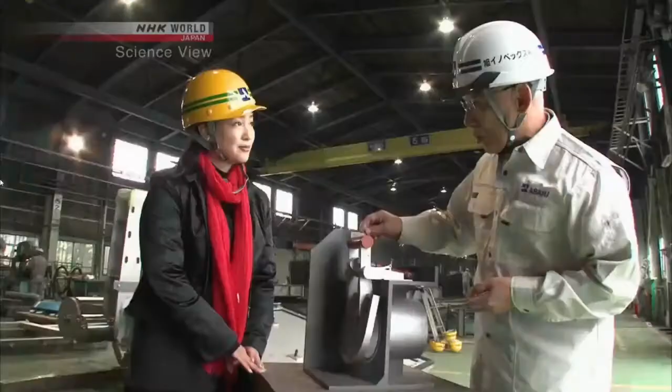J Innovators Takumi is a popular segment on Science View. We'll introduce several revolutionary inventions by Japan's Takumi that have enabled significant advancements in disaster prevention technology.

Science View is a regular program broadcast on NHK World that features Japanese science and technology. Today we're bringing you a special edition featuring Japan's Takumi, which I report on in the J Innovators section of the show. The subject of our program today is disaster prevention through preparedness.

We invited Assistant Professor Megumi Sugimoto of the Institute of Decision Science for Sustainable Society at Kyushu University to join us as a commentator. Thank you for coming. It's my pleasure. Dr. Sugimoto, I know that you specialize in risk management for disasters and are working hard at disaster prevention and recovery work overseas.

First, could you tell us about the characteristics of Japan's natural disasters? Certainly, Japan has some of the most disasters involving water, and stands out for earthquake damage.

This is a list of natural disasters that have occurred recently in Japan, where there was significant damage. In each of these disasters, more than 10 people were killed or went missing. I remember reporting on these large disasters for other news programs, yet looking at this list again, it really seems that large disasters are happening every year.

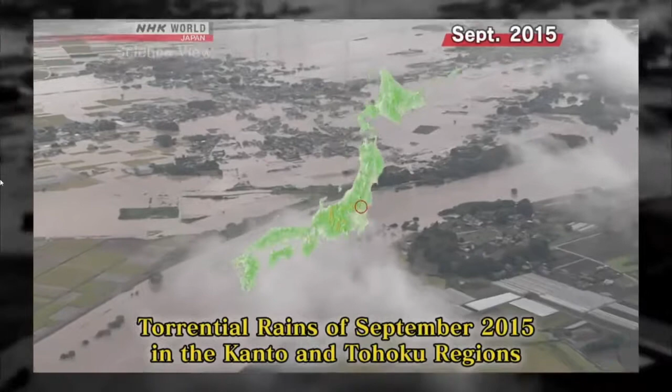September 2015, eastern Japan was attacked by record torrential rain. Several places in the northern part of the Kanto region had a total of more than 600 millimeters of rain over 4 days. A sudden increase of water in the Kinu River, which runs through the city of Joso in Ibaraki Prefecture, caused the river's levee to burst. Due to flooding from this breach, 40 square kilometers—about one-third of the total land of Joso City—was submerged. Approximately 4,300 people who were unable to escape had to be rescued by helicopter or boat.

I'm at an area heavily affected by a river embankment that burst in 2015 due to heavy torrential rain. Torrents of muddy water enveloped the area, destroying over 50 houses. Over there is a river embankment that collapsed. It is now 2.5 years since the collapse, and the reconstruction work has finished. Let's go and have a look.

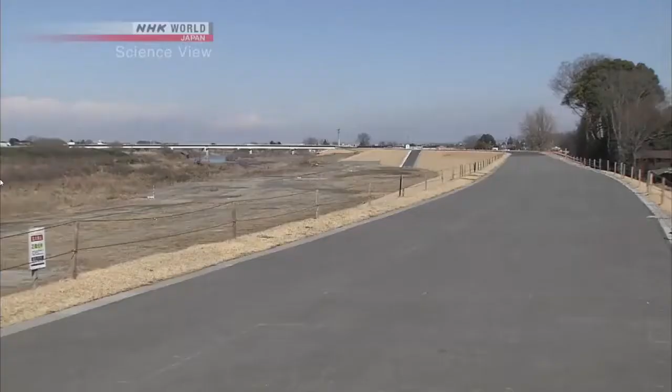Over there is the Kinu River. This is the ordinary water level. The embankment was repaired and enlarged to be 2 meters wider and taller than the previous one. We spoke to the person in charge of river management for the Kinu River.

As you can see, there are a few new homes over there. These homes are new because the previous structures were washed away by the torrent of river water. They were rebuilt in the same location.

Why did the embankment fail here? This area's embankment was built a little low. The water level of the Kinu River rose up and over the embankment. The water overflowed into the residential area on this side of the embankment, and it rapidly started to erode the embankment until it completely failed.

I see, so the water level was greater than the embankment could handle. That's correct. The unexpected collapse of the embankment caused a complex disaster, with houses washed away and destroyed and lifelines that broke down. We could say this happened especially because the infrastructure was well developed, and on the other hand, Japan's aging infrastructure could cause a major problem in the future.

The embankment in this area was built in the 1940s. The old infrastructure may not be able to withstand future natural disasters such as earthquakes and floods. Therefore, it is important to quickly find sections that have deteriorated with age and deal with them promptly.

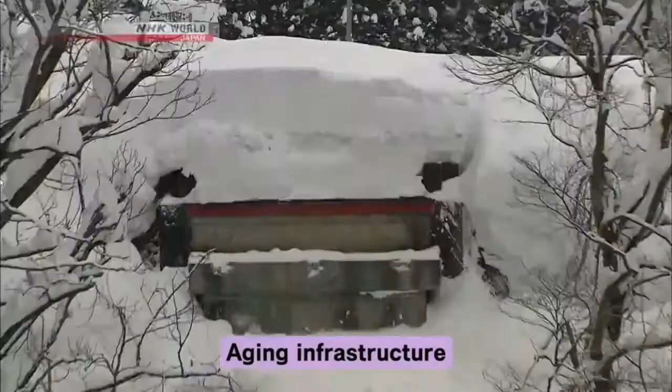Mino City is located at the north of Osaka Prefecture.

Hello, I'm Michelle Yamamoto. This is today's Takumi, or innovator, Kazuhide Nakaniwa. He runs a construction site surveying company that takes measurements during construction projects.

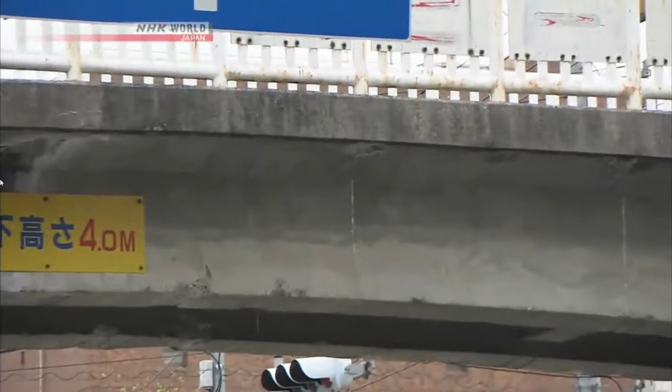The device next to the Takumi was created to tackle the problem of aging and deteriorating infrastructure. Right now, we are using the device to measure the cracks in that bridge. Viewed normally, there aren't any visible cracks, but when you look through the device, you can really see it up close. It's almost like using a telescope. The cracks are clearly visible from 20 meters away.

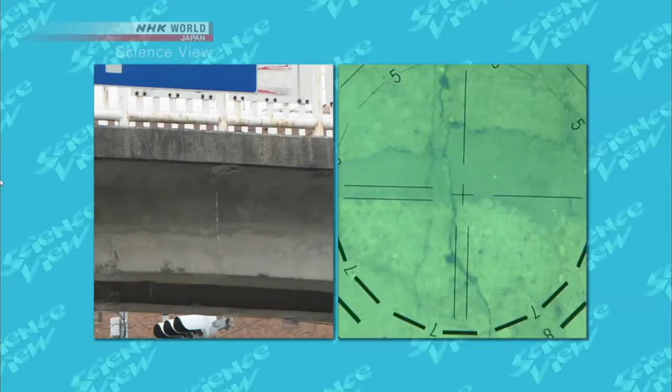But detecting cracks isn't the only thing this device can do. It can load the data into a computer as a 3D image.

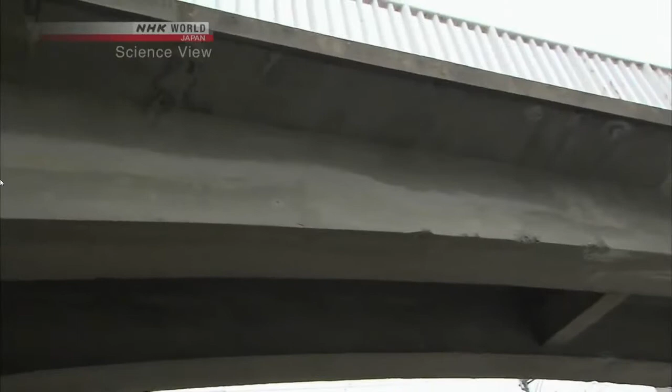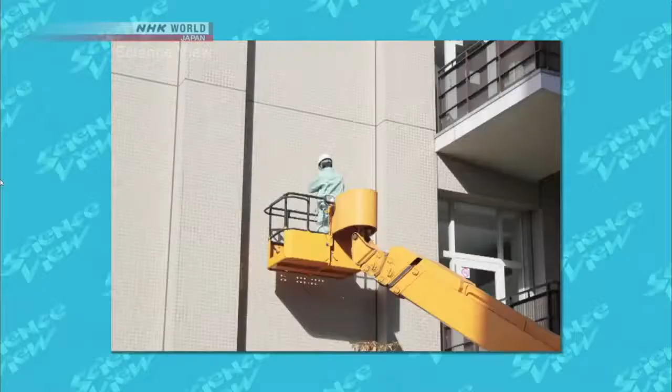A detailed study of the cracks is needed to assess the state of an infrastructure. But until now, cracks were measured with a special ruler placed directly on the crack. To do this, it was necessary to bring in a crane car or build a scaffold, and most crack records were drawn by hand.

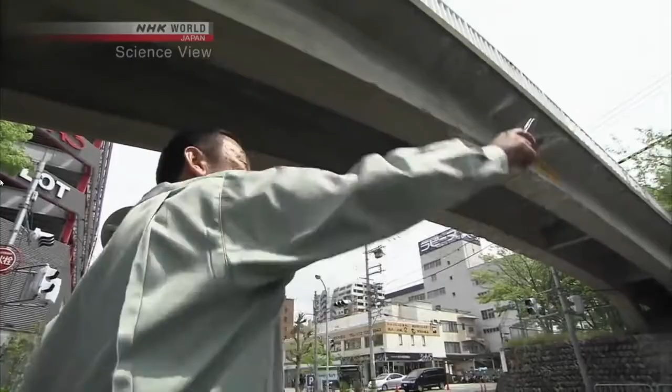A comment from one of his on-site workers motivated the Takumi to create this crack measurement system. He said, 'Why do engineers have to draw sketches?' That question got me thinking. This was the resulting device.

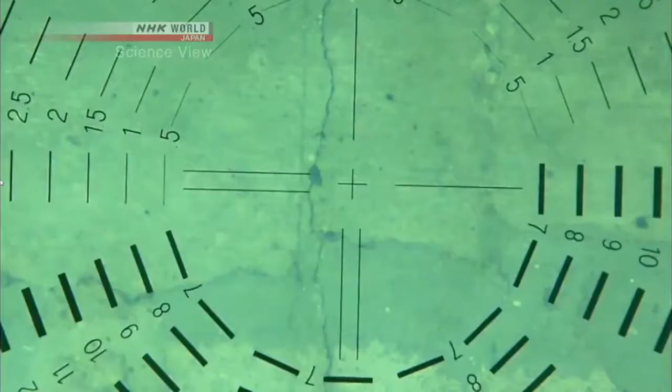You can observe cracks from a distance and keep a precise record of its shape. The Takumi's knowledge and experience in the field helped him develop the device. Laser measurement technology was used to measure accurately from a distance.

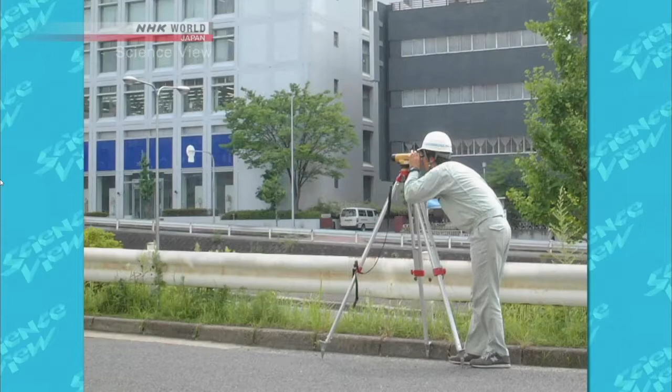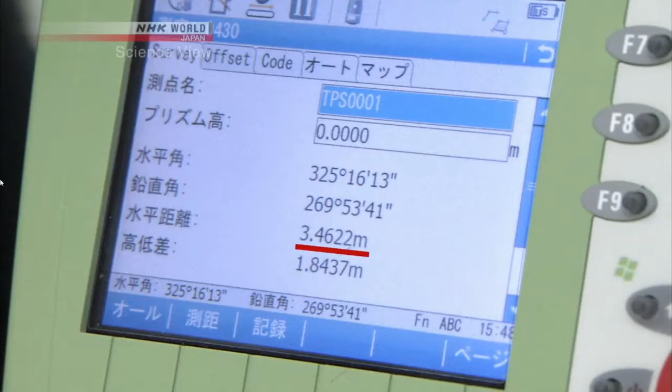With the press of a button, the Takumi's crack measurement system emits a laser beam which hits the wall and bounces back to the device. The distance is 3 meters, 46 centimeters, and 2.2 millimeters. It can accurately measure up to 1/10 of a millimeter. The viewfinder is equipped with a scale used to measure the width of a crack. By finding the scale line that matches the crack, they can calculate the crack's width based on the distance.

But there was still one problem: the width appears different depending on where you look at it from. This vertical line looks much thinner from the side. Let's use these lines as an example — the greater the angle, the thinner they appear. The angle affected the accuracy of the reading.

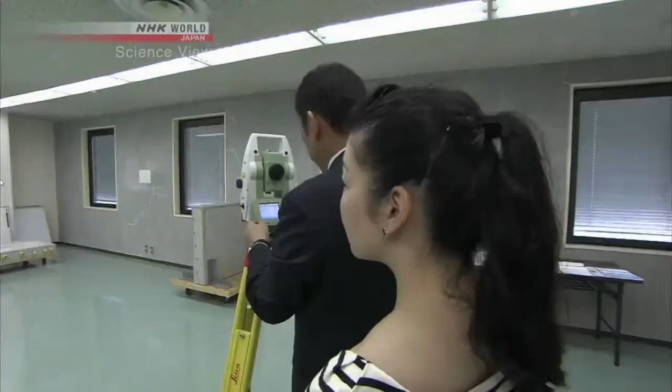To remedy this, the Takumi's device has a function that makes adjustments as necessary. It seeks out the incidence angle and uses it to calculate the width. It needs the incidence angle of the crack. The key is to measure the distance between 3 points near the crack. By calculating these numbers, the device is able to find the incidence angle, and then, based on the incidence angle, it can calculate the actual width of the crack.

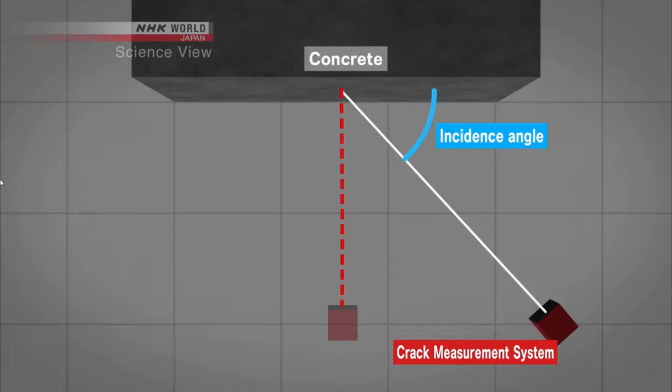This was how the concrete crack measurement system, which can detect signs of deterioration from a distance, was developed.

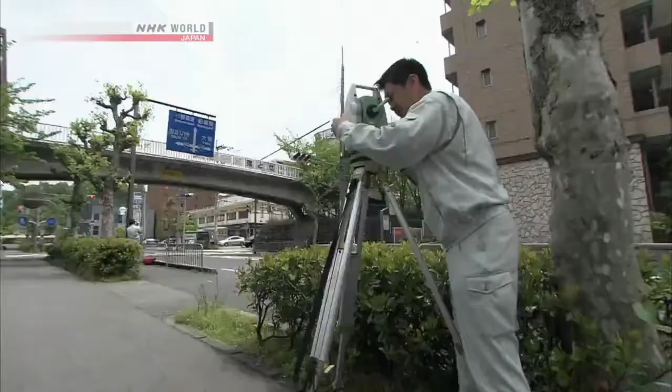The deterioration of infrastructure — the Takumi believes this problem extends well beyond Japan. Infrastructure is directly connected to human lives. I want to prevent developing countries from making the same mistakes as developed countries. I hope that they will take an interest in maintenance and work to detect cracks at an early stage. The Takumi's device is sure to play an important role in Japan, where measures for aging infrastructure are in high demand.

I'm by the riverside about 800 meters from the area that had collapsed, and here is a floodgate. Normally it is open to allow water from outside the embankment to flow into the river, but when there is heavy rain and the water level rises, the gate is shut closed to prevent flooding. During the heavy rainfall in 2015, the local official in charge closed it by hand, but it is a very dangerous task to do when the water level is rising. That is why one Takumi developed a floodgate which opens and closes automatically depending on the water level.

Hello, I'm Michelle, nice to meet you. Oh, thank you for coming. I'm Hoshino. Today's Takumi is the president of a floodgate manufacturer, Kyosuke Hoshino. We went straight in to see the floodgate his company invented.

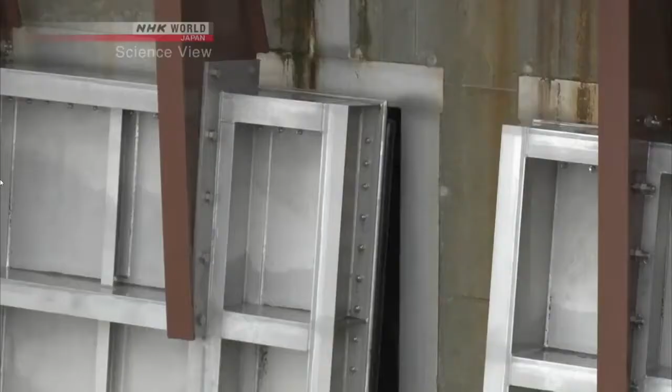This is one of our floodgates, although it's not finished yet. Oh, so this is it. This is one of the Takumi's floodgates that has been installed on a riverbank close by. In hearing that the gate required neither an operator nor any power, I had imagined a sophisticated high-tech device, but it turns out to be a very simple mechanism.

The most important elements are the weight at the top of the gate called a balance weight, and a float on the inner side of the gate.

The gate's mechanism for opening and closing works like this. When there's heavy rainfall and the rainwater accumulates on the right side, the gate will be pushed to the left side. Then, with just that slight force, the balance weight falls to the right side, opening the gate to the left. By the principle of leverage, a gate that weighs more than 500 kilograms can open automatically with changes in the water level.

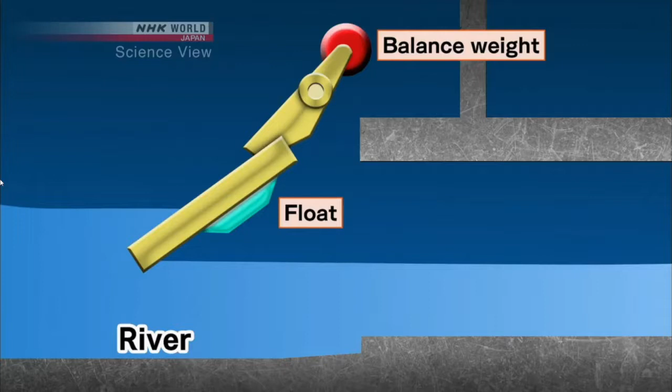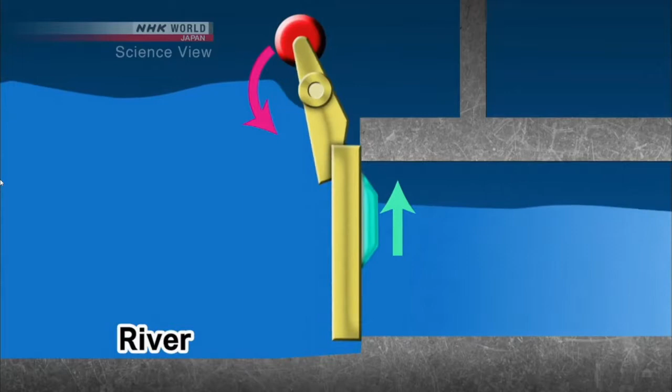On the other hand, when the level of the river rises due to backflow from high tides or tsunamis, the gate will be pushed to the right and the balance weight will return to the left. The float will gain buoyancy, and that force then causes the gate to shut tight.

This automatic floodgate is designed to open and close using the power of leverage and buoyancy, but no electric or other power source.

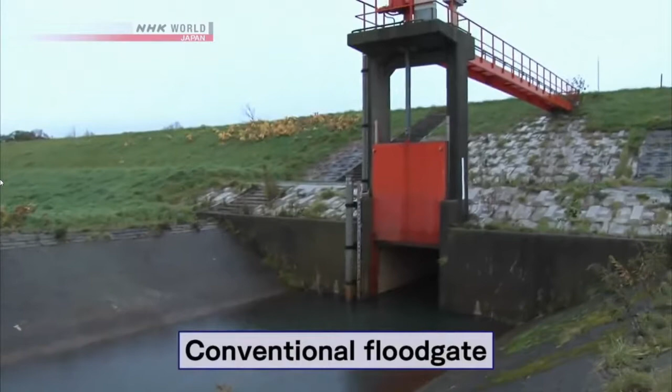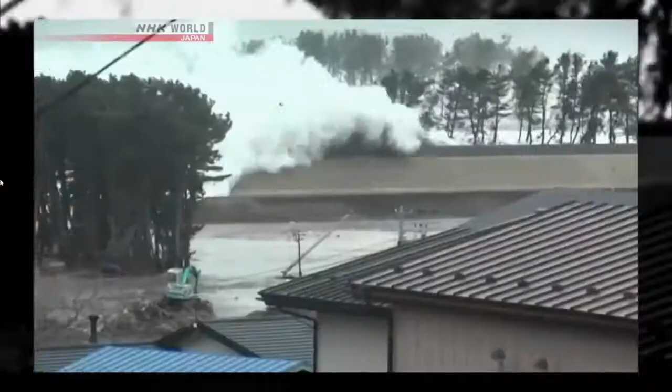Many conventional floodgates require winding or other manual operation to be opened. A person must be available to check the water level and manually open and close the gate. In fact, when the huge tsunamis hit northeast Japan in March 2011, many volunteer firemen lost their lives trying to operate floodgates.

By using our floodgate, what once required a human hand can be achieved without any operator. That can save lives. But he encountered more than his share of difficulties in reaching this point.

Well, we went through endless trials and many errors. We got a lot of negative remarks. It wasn't easy. Also, achieving balance with the actual device using the calculations we had made was very difficult. It was hard to make it work as we had figured it.

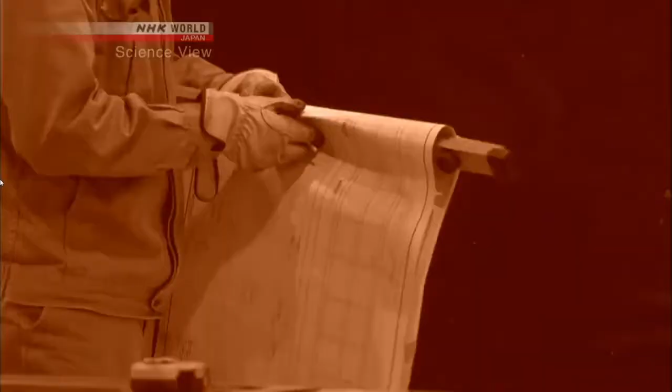It is 15 years since the Takumi's company first started development of this mechanical automatic floodgate.

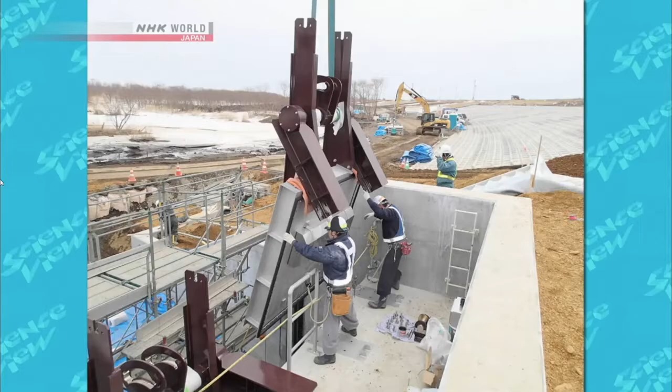Added to the difficulties they had in the design phase, without a proven track record, it was difficult to get the device accepted. People are always afraid to take a risk on something new. They go on using what they know without questioning it and feel safe that way. So, to change that and convince people with that mindset, we had to keep on telling them how good, how effective it is. It was an uphill battle, I can tell you.

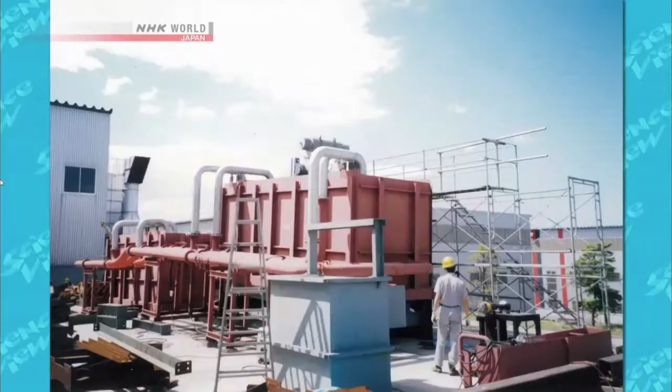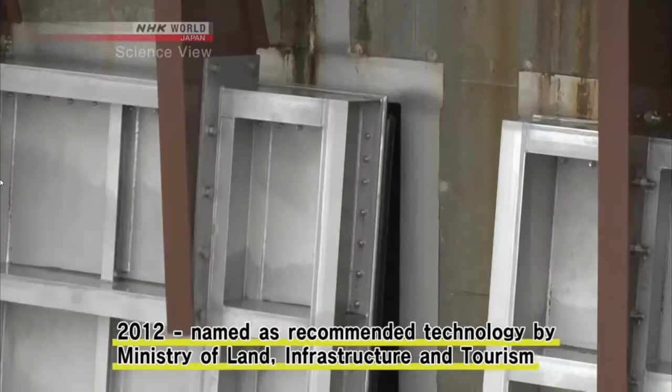Even after the floodgate had been installed, to obtain government recognition, they needed to carry out testing and demonstrations over and over. All their hard work paid off in 2012. The floodgate was selected by a government ministry as a recommended technology. This triggered widespread recognition of the device.

I want to take this all over the world. If this could be of use to others, I would love to take on that challenge. I really hope to be able to do that.

The Takumi's auto gates had been adopted in 3 locations among the Great East Japan earthquake disaster areas, and all of them operated normally. Thanks to those results, the gates were installed in many more places later on. Now in 2018, nearly 1,700 gates have been installed around Japan, and I heard that they're fully demonstrating that functionality. Considering that it can be quickly used even where the electric power situation is poor, this really is incredible technology. I hope this can be used more and more for flood control, not just in Japan, but overseas as well.

And what did you think of the crack measurement system?

Much of Japan's infrastructure was built in the 1960s and 1970s, during what is known as the high economic growth period. Now Japan is facing a significant problem as that infrastructure ages. So I think this equipment is really necessary. This technology seems really useful for disaster prevention, just like with the floodgates, as it is a means of acting preemptively before disaster strikes.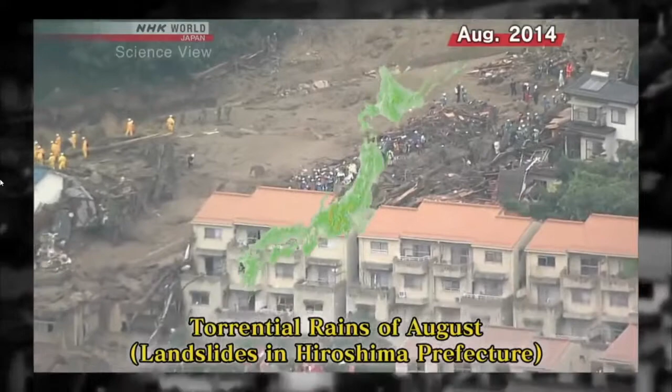From the night of August 19th, 2014, to the morning of the 20th, torrential rain concentrated on a narrow range of the city of Hiroshima. More than 200 millimeters of rain fell in 3 hours, and a large-scale landslide simultaneously occurred, causing the deaths of more than 70 people.

The damage spread because the area which experienced the severe rainfall was a residential area close to the mountain with homes that were very close together, and it happened during a time when it was difficult to respond. This is also called an urban-type sediment disaster.

Sediment disasters happened in more than 100 areas within the city, and as reconstruction continues, the evidence of the disaster remains. One couple who had escaped danger by just a few meters shared about what it was like then.

The amount of rainfall seemed a little different. I was surprised to find that the windows were completely black. Muddy water had covered the entire window. When we woke up, we saw that the homes around us were destroyed. The home next door was half destroyed by the landslide, and the homes one level above were completely destroyed with 2 people killed. The husband showed us photos he took directly after the disaster.

Is this really the top of the roof? Yes. The sediment flowed up to the top of the roof, nearly 3 meters from ground level.

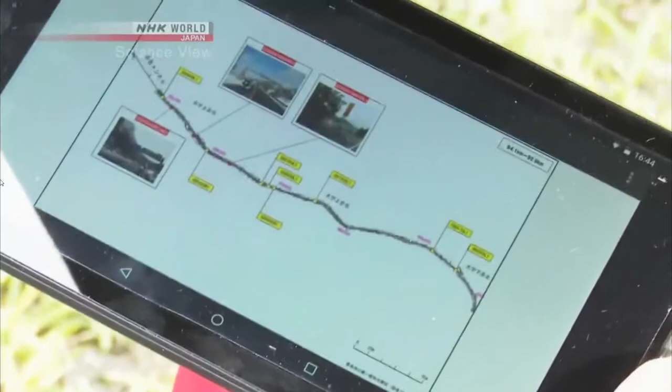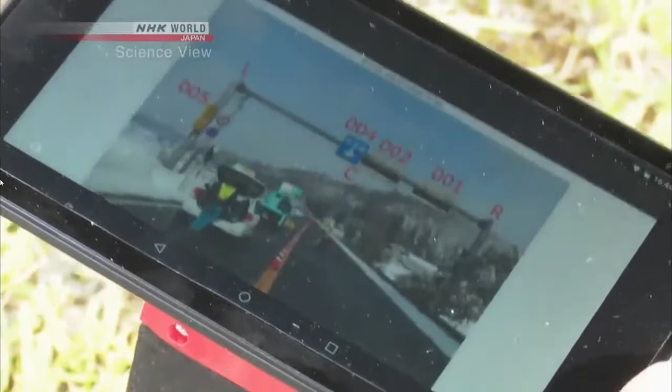The screen showed information about a road. The marks shown are spots that have already been inspected. There are also photos and detailed reports from each inspection.

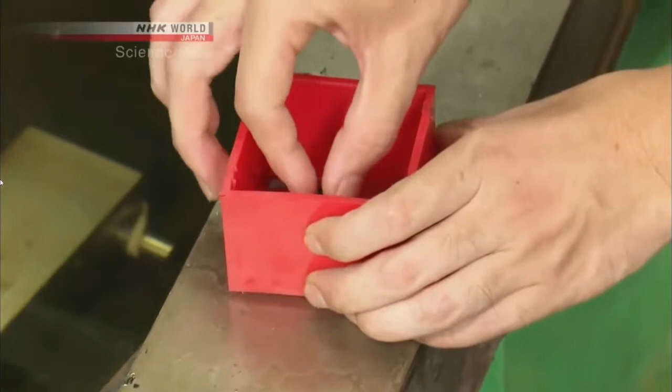Inside the stake, there's a radio frequency ID tag, like this one. The radio frequency ID tag, or RFID tag, is 2 centimeters wide and protected by a shockproof material. It is located in the top part of the stake. Each tag is capable of storing data.

A smartphone application reads data from the stake and forwards it onto an internet server where it can be viewed. And it doesn't even need a battery, because the passive RFID tag draws its power from radio waves from the smartphone. These stakes are also used in disaster areas.

These images are from Japan's massive earthquake and tsunami in 2011. They document the disaster and also show planned reconstruction in that area.

They're also developing stakes to help prevent disasters. They rattle the stake to simulate an earthquake or a landslide.

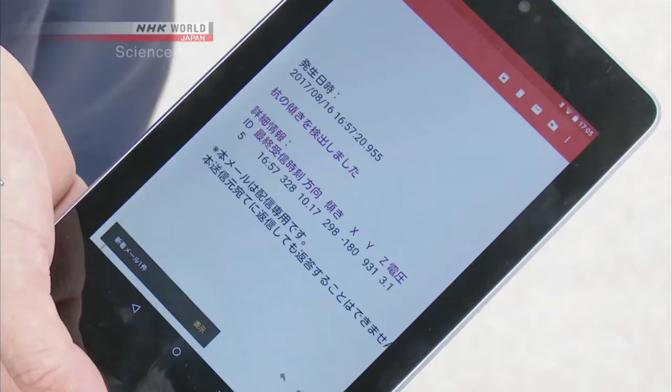I just got an email. Oh, what does it say? It tells me how the stake is tilted, what angle, and in which direction.

How does this work? The secret is inside the stake. There's an accelerometer that detects ground vibrations. It's battery operated.

When the stakes shift or move due to avalanches, landslides, or nearby construction work, that information is immediately sent to a nearby receiver. From there, it's relayed over the internet to companies and individuals by email.

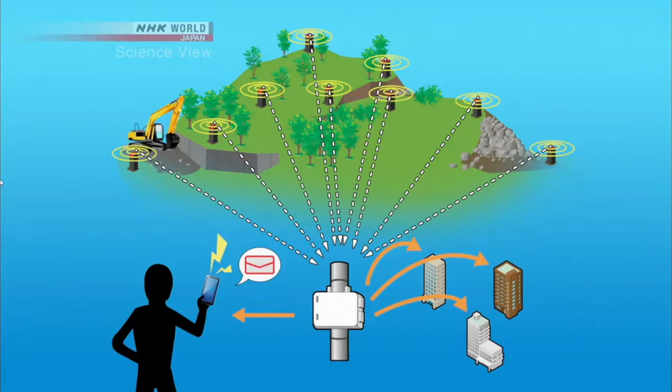The stakes can also be built with sensors that detect rising water levels, such as from heavy rainfalls. These stakes are already in place in higher risk areas, helping to reduce damage from natural disasters.

And there's something else very special about these stakes. This is what we use to make the stakes. These? But they're used plastic.

That's right. Recycled plastic films. We use these to make our stakes.

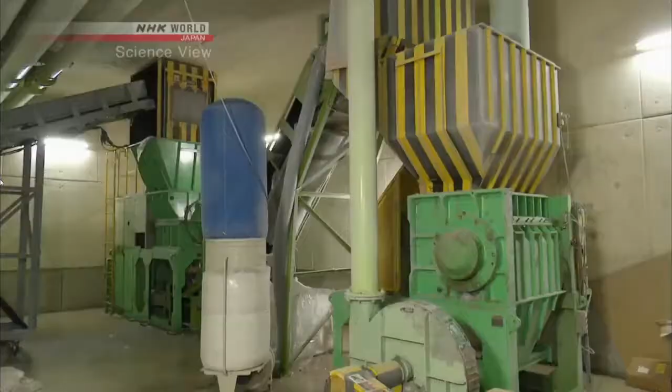The stakes made of plastic are light and easily portable. The challenge was making them strong enough. To address this, they adjusted the balance of constituent polymers. With just the right balance, the stakes are both strong and durable. The recycled plastic is fed into a machine, melted, reshaped, and the stake is done.

They are eager to find even more uses for their stakes. Our recycling, sensors, and RFID tags all add value to our products. We want to offer this Japanese technology to the global community. For that, I want to come up with even more ways for the stakes to help prevent disasters.

What do you think of the stake? It's very light. Landslide disasters are hard to anticipate clearly ahead of time, and they seem to occur instantaneously. In the case of Hiroshima, sediment disasters happened one after another in more than 100 places. If we could detect abnormalities in the ground as soon as possible and share that information with the community, we might be able to reduce the scope of the disaster. I really hope this technology is used for disaster prevention in the future.

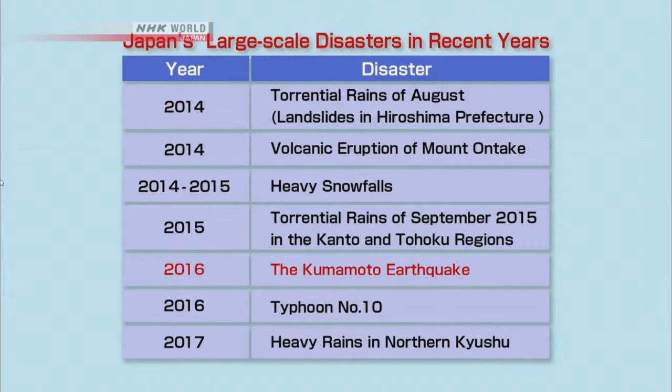Next, this is the third type of disaster. The Great East Japan earthquake that struck Japan in 2011 was followed by the 2016 Kumamoto earthquake, which was a 7 on the Japanese earthquake intensity scale. The epicenter was about 102 kilometers away from the university where my lab is, and I felt the tremors at around 5 on the Japanese earthquake intensity scale. Right after it happened, I went out there to investigate. I will share about what it looked like there.

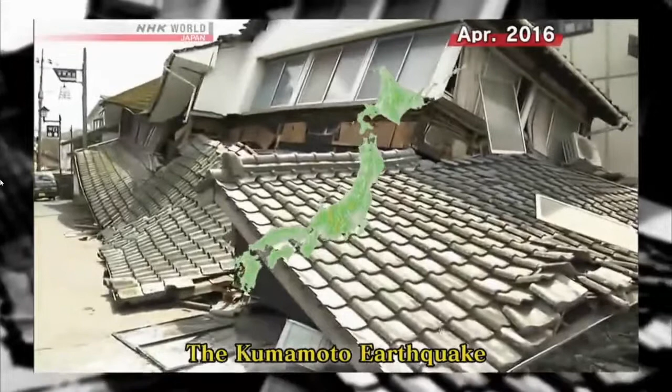April 2016. An inland earthquake with a maximum of 7 on the Japanese earthquake intensity scale struck Kumamoto Prefecture. What was notable about this earthquake were the many aftershocks that followed. The earthquake even managed to collapse stone walls of Kumamoto Castle, built more than 400 years ago.

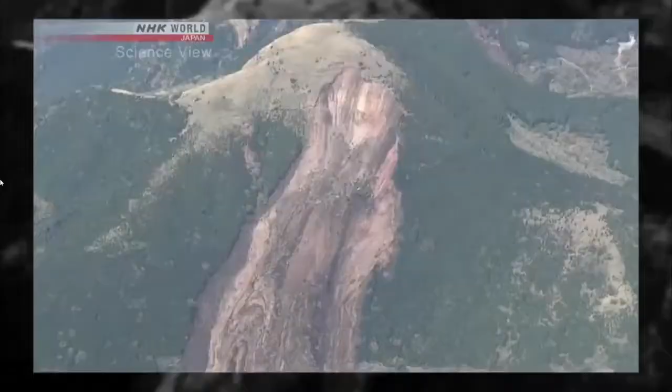In the village of Minami Aso, there was a large-scale landslide and the road was cut off. A large bridge more than 200 meters in length collapsed, and about 1,000 people were left stranded. More than 200 people perished in this disaster, including related deaths.

I've come to the village of Minami Aso, which experienced significant damage. Close to 2 years have passed since the earthquake, but even now the barren mountain surface indicates just how powerful the energy of the earthquake was.

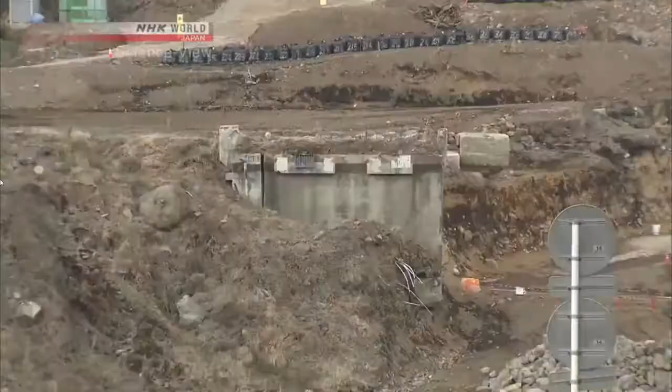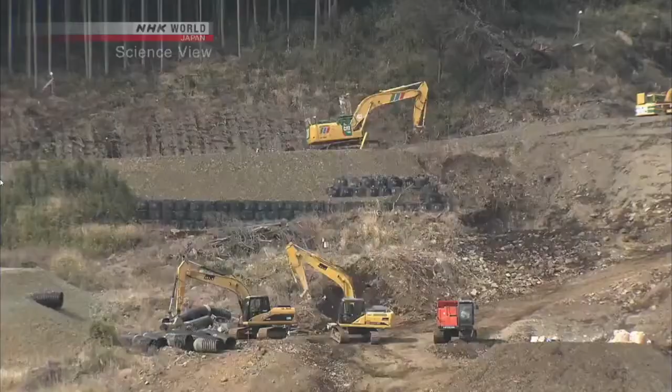Lying ahead of us was supposed to be a large bridge, as you can see from the blue road sign. However, gaps in the ground caused by the earthquake led to its collapse and destruction. Now all that is left is the road that led up to the bridge. Restoration work on the bridge is underway with the goal of reopening the road in fiscal year 2020.

Mr. Fujimoto, who runs a farm in Minami Aso, evacuated to a gymnasium near his house right after the earthquake. We spoke with him about the hardship he faced.

We couldn't use our mobile phones at all, as there was no way to charge them. There wasn't any power. After a whole day passed, the town finally set up its emergency response headquarters, and so then we were able to take turns charging our phones there with an extension cord. I believe we were able to do this around the 3rd day. So until then, you didn't have any TV or radio? Not at all. So you were completely cut off from any sort of information like that? Yes.

Once the aftershock subsided, Fujimoto returned to his home, only to find another problem waiting: the water problem. As I recall, tap water was not running for about a month. And even when the water finally did start running again, it smelled like sulfur and really wasn't potable at all. None of the people who returned to their homes and lifestyles drank that water. They had to make do with bottled water.

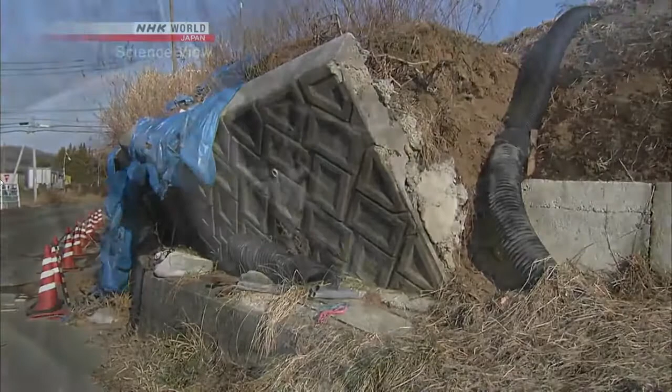The damage from this earthquake forced up to around 180,000 people from Kumamoto Prefecture to evacuate. Many people worry about difficulty obtaining water or daily supplies. We will introduce two inventions that were used to aid those disaster victims. The first invention we'll introduce that has greatly benefited disaster areas was developed by a company in Osaka Prefecture.

Hello. This is Yoshiaki Maeda, today's Takumi, or innovator.

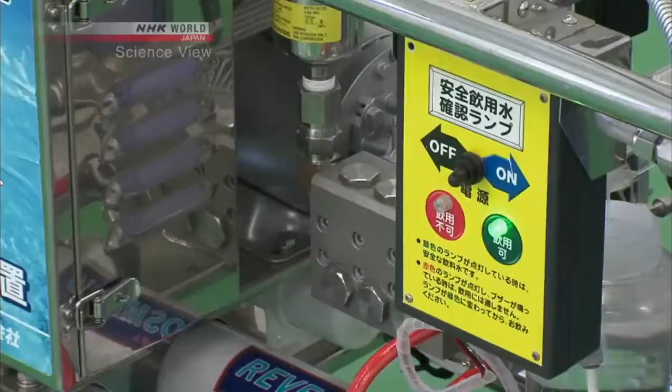He first took us to see this device. Take a look at this - it looks like a small power generator. What is it? It's a water purifier that can convert seawater into drinking water. This device is used to purify water in disaster situations. Not only seawater, but also water from rivers and lakes can be purified to drinking water standard.

16 of these machines were sent to areas hit by the earthquake in Tohoku in 2011, offering safe drinking water to a large number of people. The Takumi's device only uses 660 watts of electricity, half the amount required by a microwave oven.

But he has also invented an even more efficient purifier, especially for disaster situations. This is it - this is an ordinary suitcase, isn't it? That's what it looks like, yes. So the device is inside? Yes, the water purifier is inside it.

When it is opened up, the nozzle comes out like this, and you can start purifying your water. To test its performance, let's see it in action.

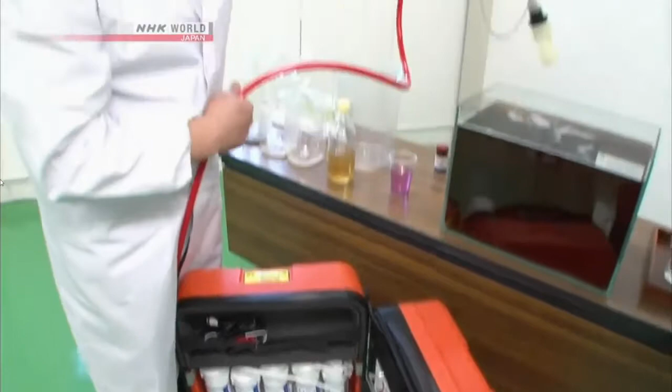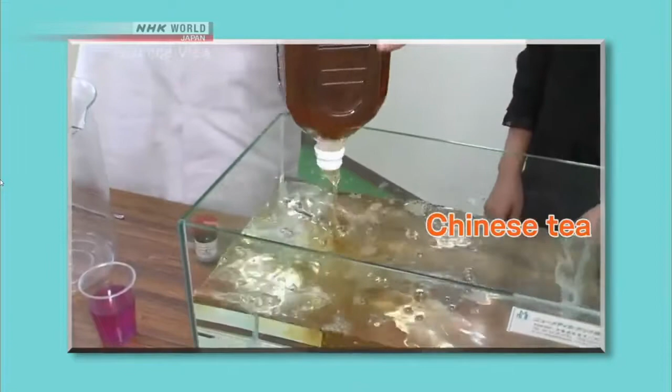We first add this to the water source. The mixture that Takumi prepared contains Chinese tea, coffee, and vinegar. He will now run it through the purifier.

After the device is switched on, it starts purifying in just 15 seconds. It's okay to drink now. It's okay? Then I'll try some.

It's so clear. Whoa, it's crystal clear. And you can't smell a thing now. Okay, let's give it a try. There's not a hint of the other flavors you added. The result is plain to see - the coloring in the Chinese tea and coffee and the vinegar elements are all completely filtered out.

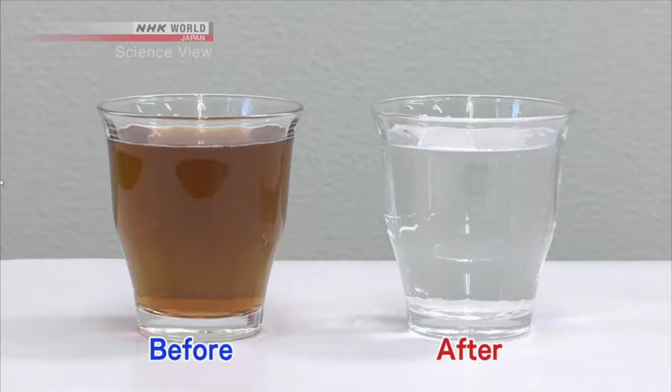The particles removed measure between 1 to 100 nanometers, too small for the average conventional water purifier to remove. Filters used in many conventional water purifiers are made using activated carbon or hollow fiber membrane and have pores as large as 100 to 1000 nanometers.

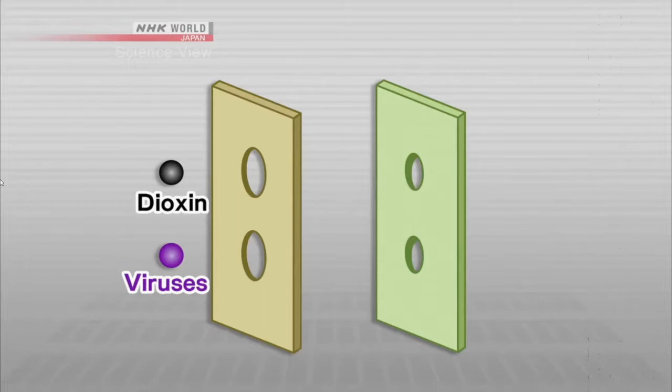Iron rust and bacteria are large in size, so they can be trapped by these filters. But matter smaller than that will get through the filter's pores. That matter can include toxic materials such as dioxins and viruses. The Takumi's purifier can remove just about all of these toxic substances.

The secret lies in these filters, and the one that plays the most important role is number 3. We took a look inside. It contained a scroll-like tube.

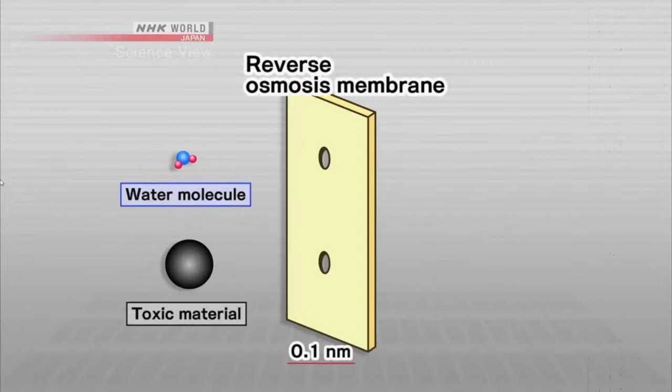This is called a reverse osmosis membrane filter. It has tiny pores of 0.1 nanometers over its surface. Water molecules are 0.098 nanometers across, so they can clear the pores, but dioxins and viruses which are larger cannot get through.

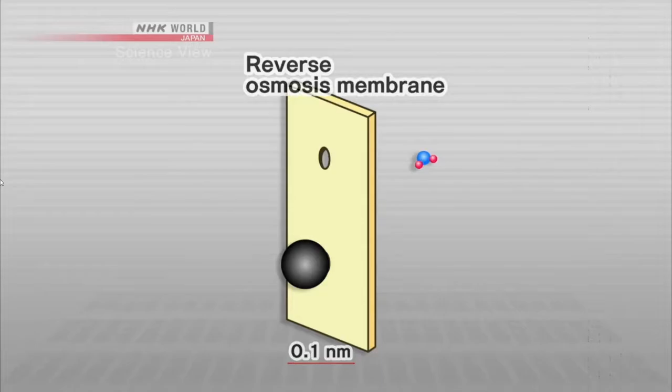But the Takumi did face a problem. The membrane's pore size is not entirely uniform when manufactured, so he could not remove all of the toxic material to achieve the target benchmark level.

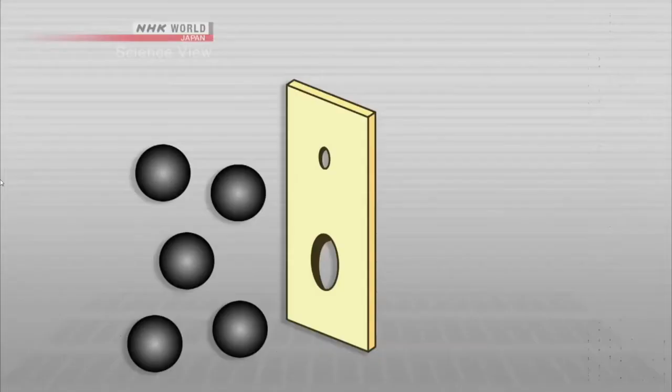After countless attempts, the Takumi had another idea. Toxic materials passed through the pores because they were so small. The Takumi's idea was to bunch them together to make a bigger mass so the filter would then catch them. It is the first filter which carries out that function, although the details are a trade secret.

The material that is treated in the first filter passes through the second filter, and then it is caught by the reverse osmosis membranes in the third filter. Once it has passed through this stage, it has produced water with almost no impurities.

But it is now known that high purity water not only actually tastes bad, but it is also not good for your health if consumed over an extended period of time. So the Takumi adds minerals derived from coral at the fourth filter stage. In this way, the Takumi's water purifier is able to produce high purity drinking water that also tastes good.

At the moment, we only offer premium water purifying devices, so now I would like to produce more reasonably priced models. I'm also working on a new water purifier that will reproduce the taste of different water minerals from around the world.

Meanwhile, one Takumi developed a helpful tool from his own experience.

Hello, I'm Michelle. Hello, I'm Kubota. Thank you for coming.

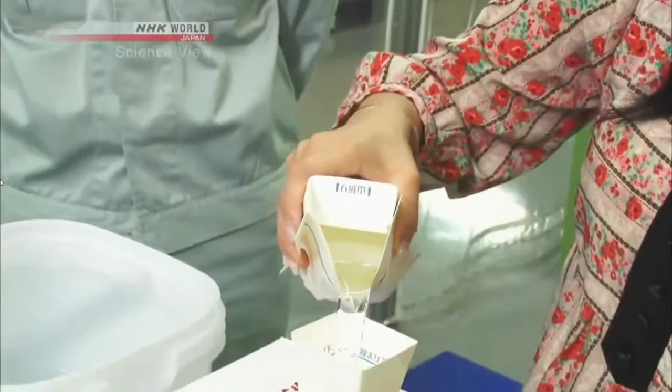This is how it's used. First, push open the holes in the side of the box to let in oxygen. Next, pour 2 liters of water in the box using the containers provided. After waiting for a few minutes, the connecting part lights up. Now it's ready to supply energy to other devices.

Once water is poured in, this power-generating device can charge a smartphone up to 30 times. But why did the Takumi decide to develop this kind of battery?

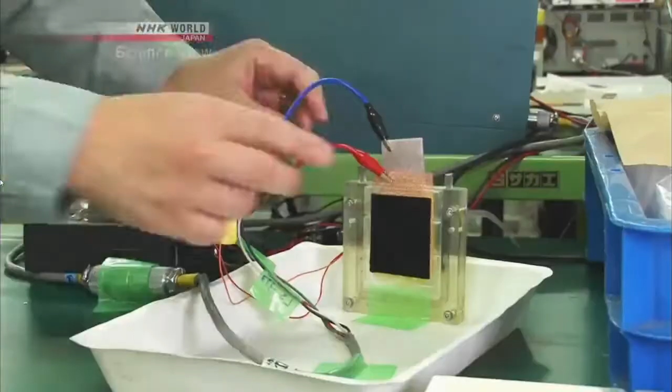Its development was closely related to the Great East Japan earthquake and tsunami that occurred in March 2011. The factory in Iwaki City, Fukushima Prefecture, was heavily damaged. Power was out in many areas during the disaster, and it was difficult to charge cell phones. As a battery manufacturer, I felt we needed to create an easy-to-use power source for emergencies. Many emergency charging devices typically use dry cell batteries, but their shortcoming is that the power capacity will decrease while being stored. Some cannot be used in times of need. So the Takumi thought of developing a long-lasting battery for emergency use.

And this is his creation, a magnesium air battery. Because the chemical reaction only starts when water is added, it barely deteriorates during storage.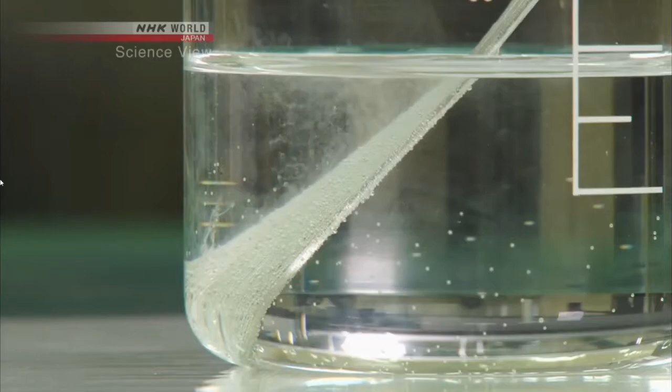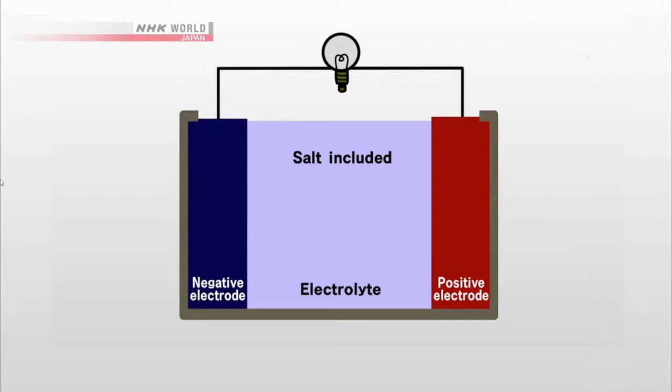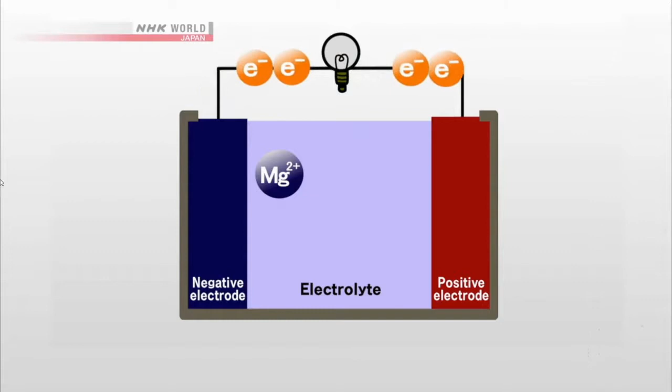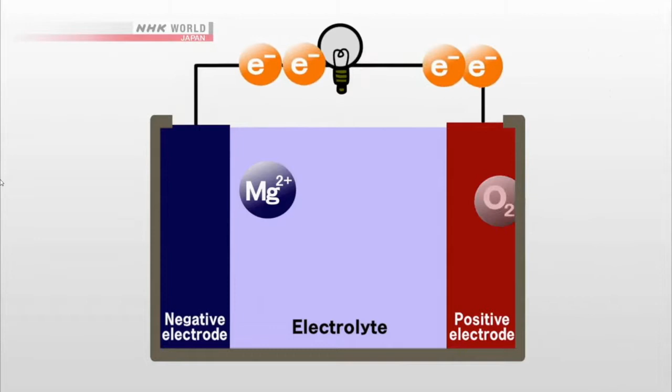This is how it works. When water is poured into the box, it mixes with salt and creates an electrolytic solution. Then the magnesium, which is the negative electrode, emits positive ions and electrons. On the other hand, the structure of the positive electrode is called an air electrode. The metal is covered with a carbon material. The air electrode does not allow water to pass through, but does let oxygen enter from the air vents. The oxygen that enters from the outside reacts with water and the electrons on the surface of the carbon and creates hydroxide ions. The battery uses this principle to create a chemical reaction that can generate power.

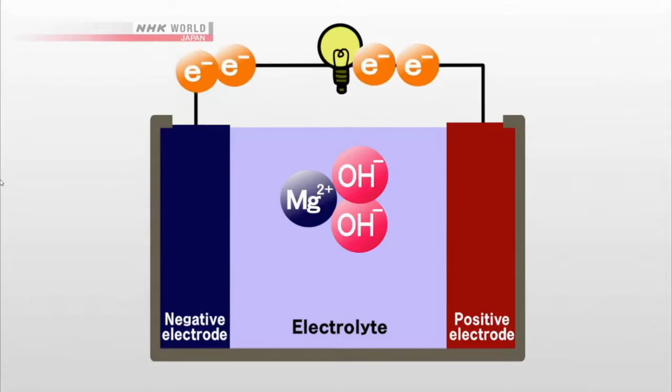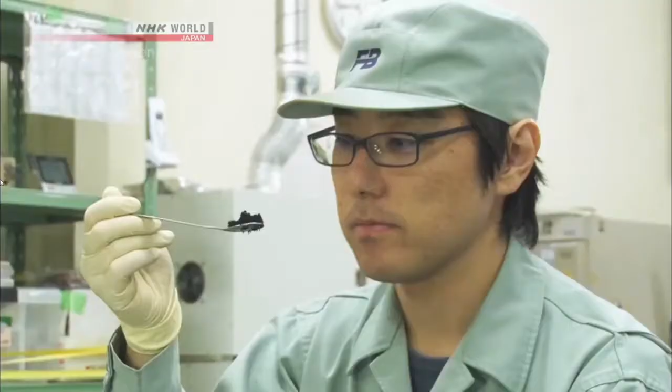This air electrode is key. In the battery system, the carbon sheet that covers the metal needs to let only air pass through, but not water. The Takumi repeatedly mixed different substances with carbon. After 1 year of development, he finally created a carbon sheet that performed as required.

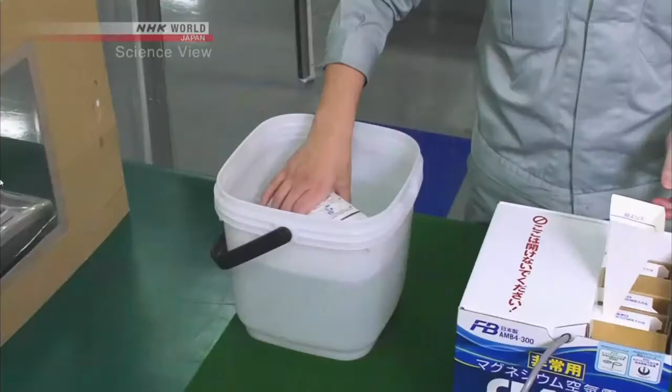The Takumi also paid special attention to the kind of water that could be used in emergencies. In a state of emergency, there is no need to use clean drinking water. Seawater, river water, or rainwater could also be used. It's perfect for emergency situations.

The development of this battery started immediately, just 2 months after the Great East Japan earthquake and tsunami in 2011. The battery was commercialized 3 years later. The battery performance was rated highly, and a smaller compact version was also commercialized the following year. In the future, I would like to develop batteries that can run household electronic appliances, such as refrigerators or microwave ovens. That's what I'm hoping for.

Those two inventions are items I'd want to recommend for a disaster area. Both of them were actually used in evacuation shelters after the Kumamoto earthquake, and I heard they really came in handy. Mr. Fujimoto said he did not have a chance to use them, but if he could have, I'm sure the situation would have been considerably better. Mr. Fujimoto said that there was a smell of sulfur in the water pipes after recovery, but the Takumi's water purifier would have been able to turn that water into fresh water.

That's right. Also, what really helps in disaster areas is accurate information. You are virtually guaranteed to have false rumors flying around in the disaster area. It is up to the individual to accept or reject such information, but unnecessary false rumors cause even more alarm to disaster victims. During a time like that, a device that will help one obtain information is a very encouraging item. However, most devices will not work if there is no power. A battery that works simply with water, even if it is impure, is a really amazing technology.